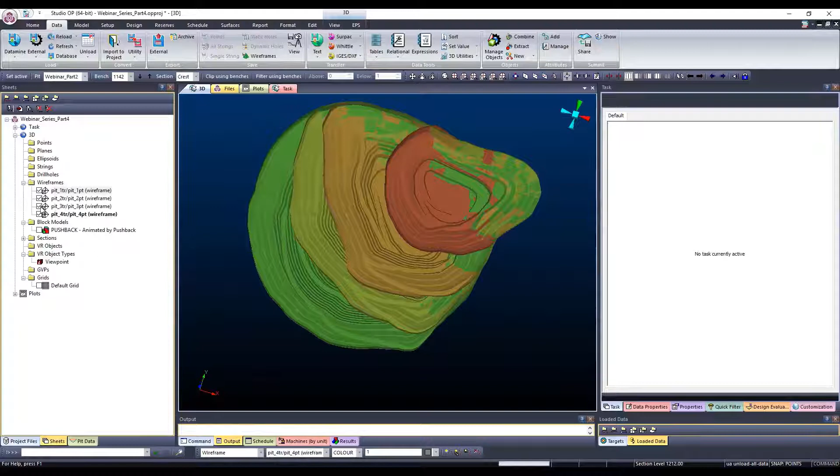Okay, so now let's go to Studio OP. Here Terence gave us the design, and from the last webinar we have this block model legend by pushbacks. As a result, I designed those pushbacks for this webinar.

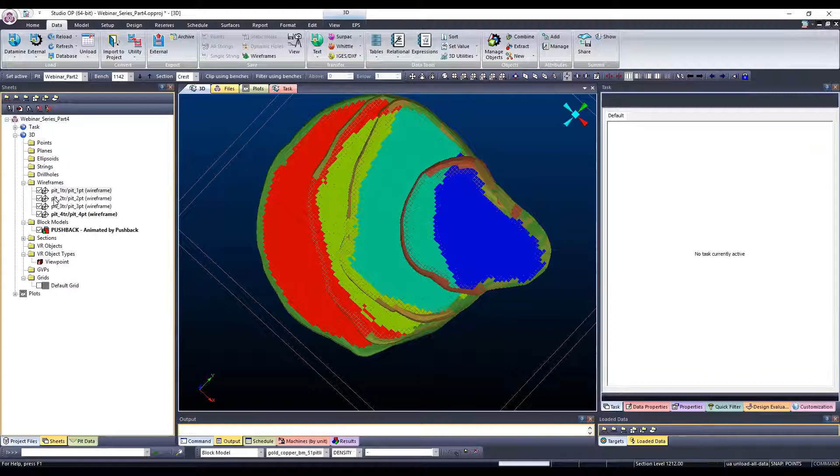First of all, I want to say these pushbacks are not perfect. As you can see, the block model from NPV is just a guide for the pushbacks, but even so, some shapes are not that good, and some benches have no way out. But there's no problem - NPV won't consider this, and also it's not our goal to make perfect pushbacks.

So after we design the pushbacks, I need to save them, and then I can go to NPV. Here I'm using the same project as I used in the last webinar, the same project Hajar used. Okay, here we have our pushbacks.

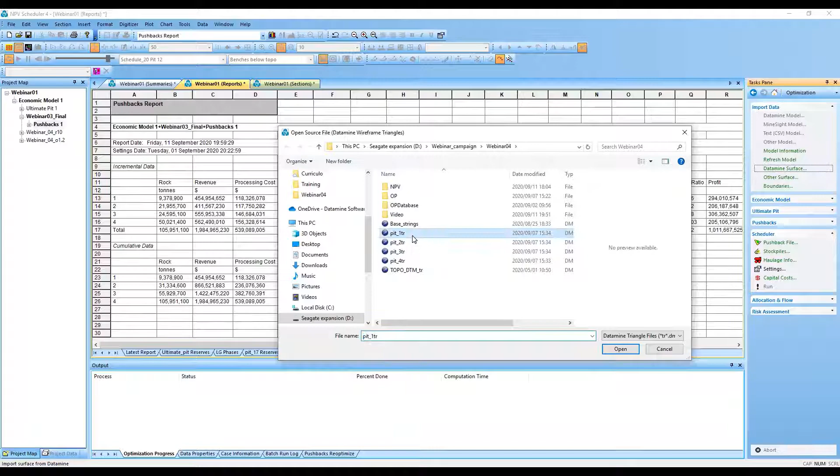So now our first step is to import those surfaces. Here in the optimization section, you can go to Datamine surface. I need to tell you guys that it's very important to import the pushbacks in order, from the smaller one to the biggest one. So here we select our triangle file, then our point file.

Here we don't use any of these fields. Now you need to give it a name. So we're not gonna give it a name like pushback 1. We need to give a name that will group all the pushbacks, for instance, webinar 4 pushbacks. So this is the name I choose here.

Okay, so the first surface I save, and for the next one I just click append to file, and then I select the name I already have - webinar 4 pushback 2. So I'm not gonna do this again.

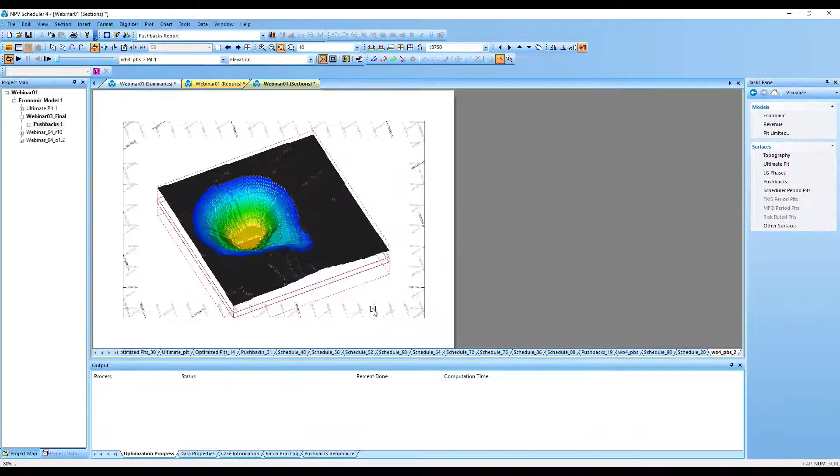So we can visualize the result - another surface, webinar pushback 2. Okay, so here is my first pushback, my second one, the third, and the last.

Just to show you guys, here is my first try - I imported them not in order, so I imported first the third pushback, then the fourth one, and when I imported the second and the first, nothing happened. So that's why it's very important to import the surfaces in order.

You can also go to report and calculate the reserves from each pushback. I'm not gonna do this, but it is also possible.

I also made a spreadsheet here called factors, because as we're gonna do the ramp up, I set how many tons of rock and ore we're gonna need through these years - so the first year this amount of ore, this amount of rock, and the second year, at 3/4, requires this amount of rock and this amount of ore. I also created this minimum and maximum rock and minimum and maximum ore.

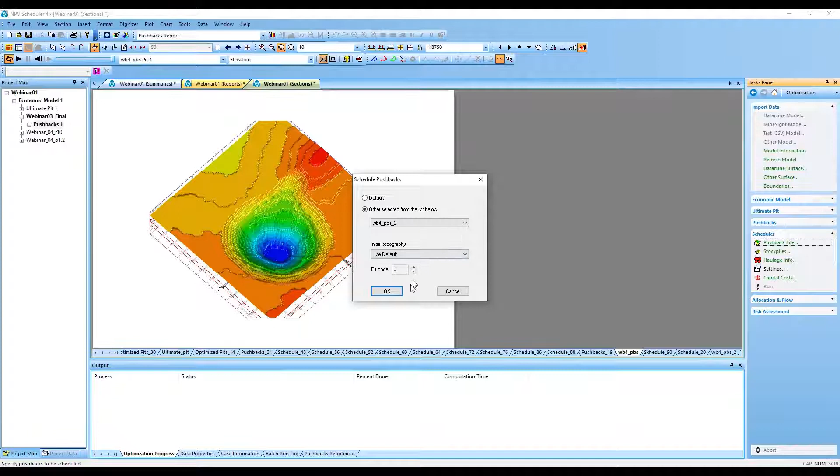Click OK, and now settings. So here is very interesting, those tabs. The first tab calls time, and this tab is about how, without the software, how long is a year, because NPV doesn't know counting by days, but it knows counting by tons.

As it is, NPV considers 1 million ton of ore as 1 year. So every time this number is achieved, it's gonna change the period, it's gonna change the year. We call this a hard constraint, so the software will do everything it can to achieve this value and stay at it. In our case, our rate is not 1 million, it's 1.2, so we can click in ore, edit, and change to 1.2.

Here below we set our ramp up. By the end of 100 years, the factor is 1. I can type, but I can also copy from my spreadsheet. By the end of the first year, I want this factor. By the end of the second year, between the first and second year, I want this factor, and the rest, I want this factor.

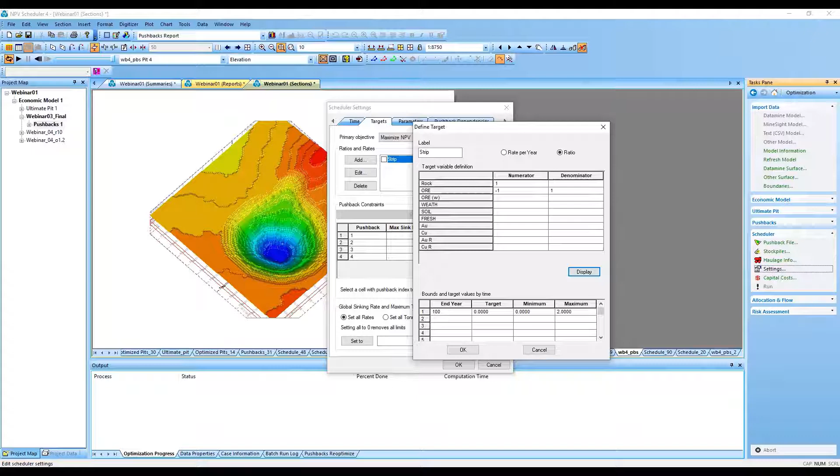Here we also set our targets per period, that's why again I made this spreadsheet, it will be very helpful. In our case, we are not using strip ratio.

We're gonna add a new one, we're gonna call it rock. Rock target. Let's use a different name from the ones that already exist in the block model. So our rock target is rock, is a rate per year.

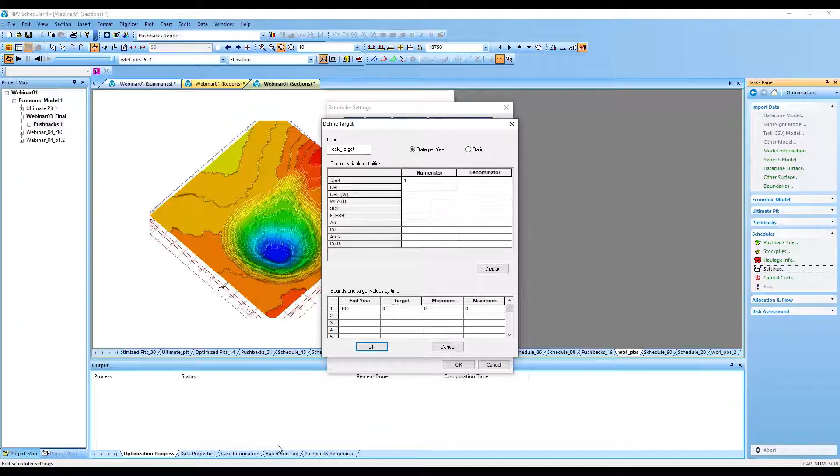And my constraint per period, let me copy here, this period. Target what I want, it's rock, and the minimum and the maximum that I allow as well.

Click OK. Right here, pushback constraints is the part that, as the name says, lets me constrain my pushback. So I can tell which pushback, the maximum sink rate, how many benches each pushback can be mined by period, or how many tons I want to be mined in each pushback by period, or even constrain and tell the software to start mining the second pushback after some period.

If we're gonna use the same value for all of them, instead of typing 6 for instance for all of these fields, we just click here, 6, set to, and it will be filled. Set to all rates and all tons, and this column will be filled.

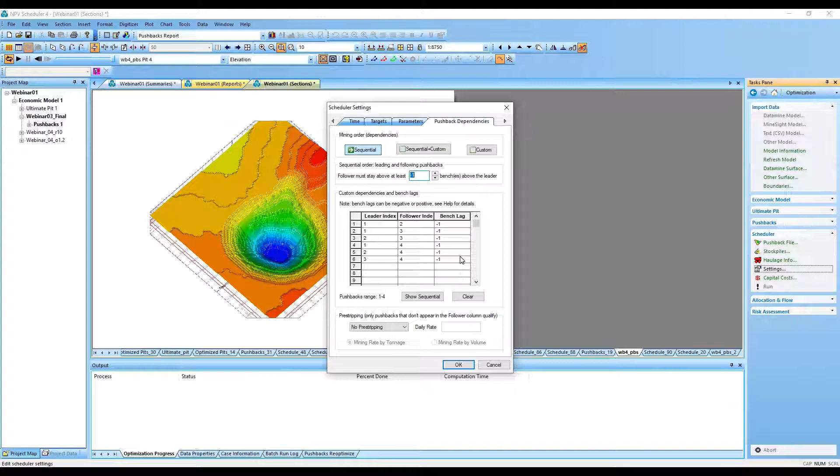So we can constrain some benches. For instance, number 2, here I'm telling the software to only start mining a bench in pit 2 if I already mined 2 benches in pit 1. Or, on the example it's the same, I can only mine 1 bench from pit 3 if I already mined at least 2 benches from pit 2, and so on. Again, it's not recommended to play with this the first time. If you leave it at -1, we let the software, the algorithm, decide how many benches we're gonna mine.

Okay, so now you can press OK and run to see our results.

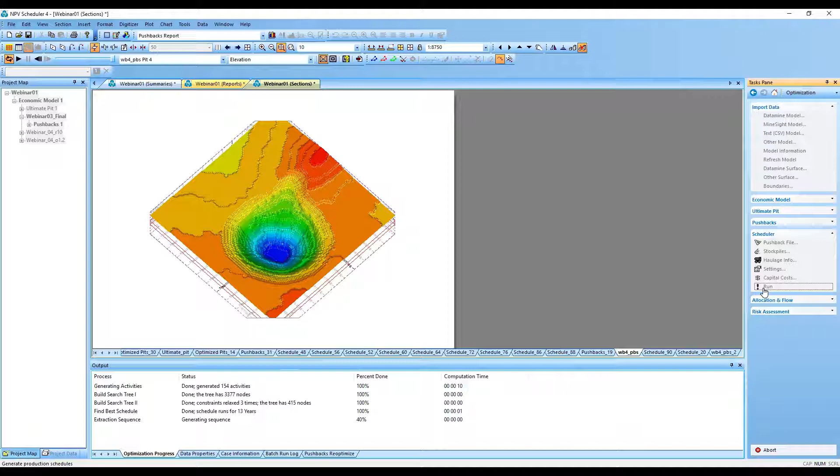All right, so here we can see in this column that the software follows exactly, or very, very close to what I wanted it to do. But as a consequence, the rock is not that constant. So you can see 4, 7, 11, 10, 11, 10, and so on.

Now let's see what else the software can give us. Let's go to report and see schedule by bench. Here in this report, we can see how many benches were mined by year and by pushback. So here we can analyze if any pushback was mined, like 8 benches in one year, or 10 benches, or 12 benches. Everyone has a number, a limit for how many benches can be mined by year by pushback, right?

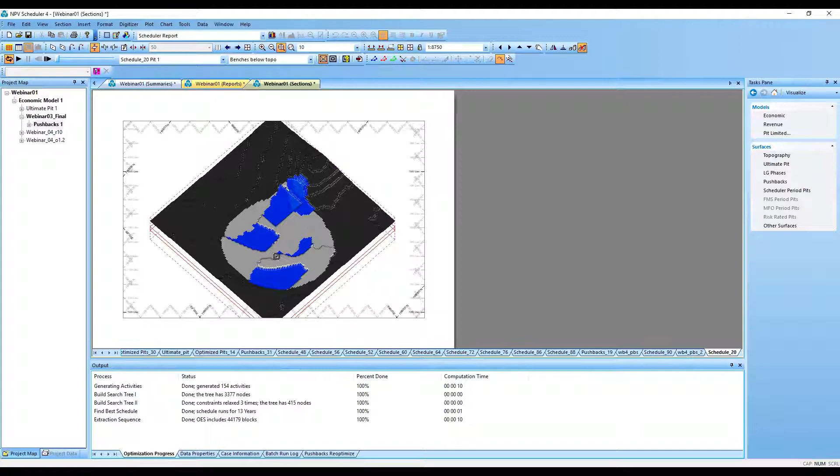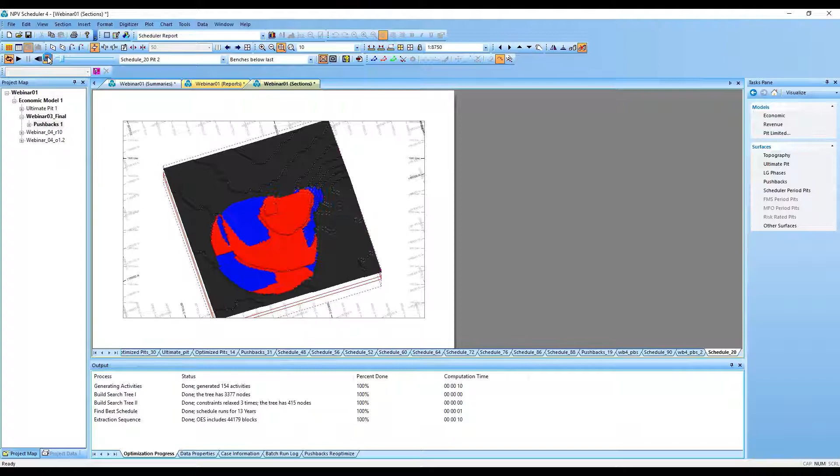Okay, here we are. So the first thing we already see is some activities in the fourth pushback. We see something's wrong already. We need to change, to fix this. I will teach you as well. So here some people like to use the last option, benches below last. It will show you which activity comes after this period. It's up to you. I like to use below topo, and then we see the progress.

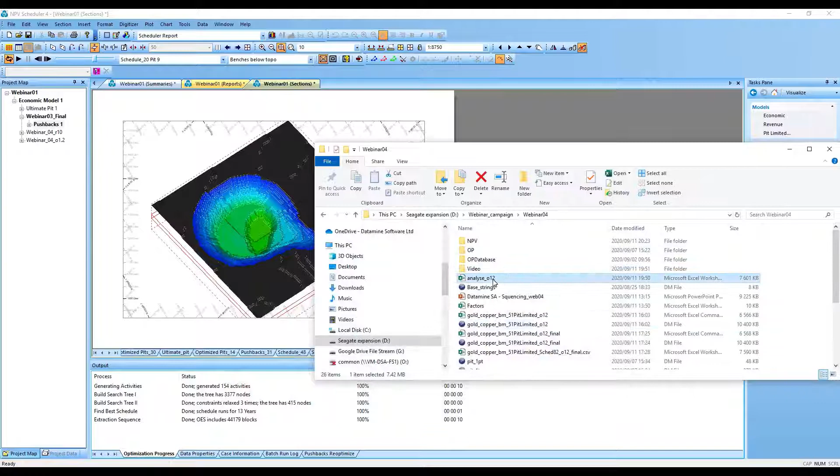We can do some more analysis in Excel. Let's click in data, export model. I already taught you how to export this model in the other webinar, so click here and follow the procedure. Generate this one, it will generate this table. And we click here in File, Save as CSV. And we can create some pivot tables based on this CSV file.

So here I create 2 pivot tables. The first one is the pushbacks by period by Z direction, by bench. Here I generate this graph that shows me from which pushback is coming the tons of each year. As we saw in the visualization, there is a part of year 1 that comes from pushback 4, and I don't want that. Even in year 2, I have something from pushback 3.

It's nice. I also create this kind of filter. I can filter here, but I can also filter here, just to see only pushback 1, by bench. Let me just put it in order. So this is how pushback 1 will be mined. Just things that we can do.

So here my first thought is to fix those pushbacks, constrain when we're going to start mining pushback 4 and 3. We can put the numbers here, I already did that. This part, so my first schedule here is the same. Let me change the report.

This schedule here is the same as we created, okay? My second one now is the one that is constrained by bench, and changes my activity, okay?

All right, I forgot, but when I generate the first schedule, it gives me this information here: how many seconds it takes to create each line. What interests us is the first one, generate activities. It generates 150 activities. As I told you, the optimal number is 300, so we need to increase this.

I found the 6 here to make 300 activities. We will see, all right? And all those other informations are details that can be changed by changing these numbers as well, okay? But I'm not gonna do this. So everything, as I said, is equal, except these 2 numbers were added, and this 6. So we can run it again.

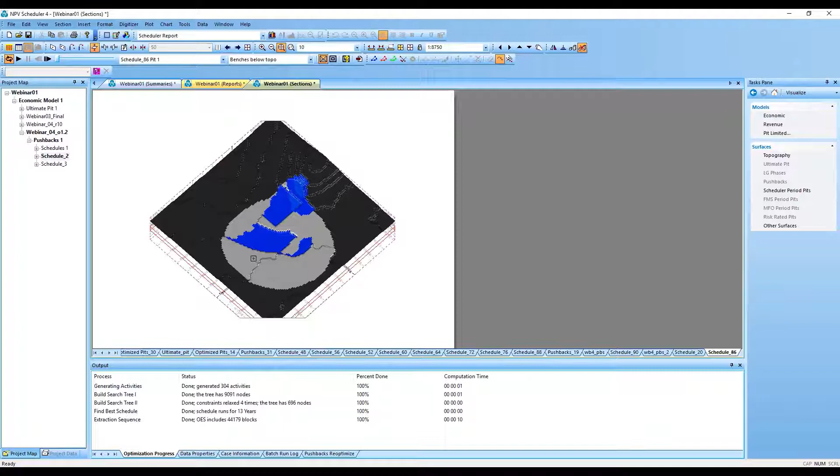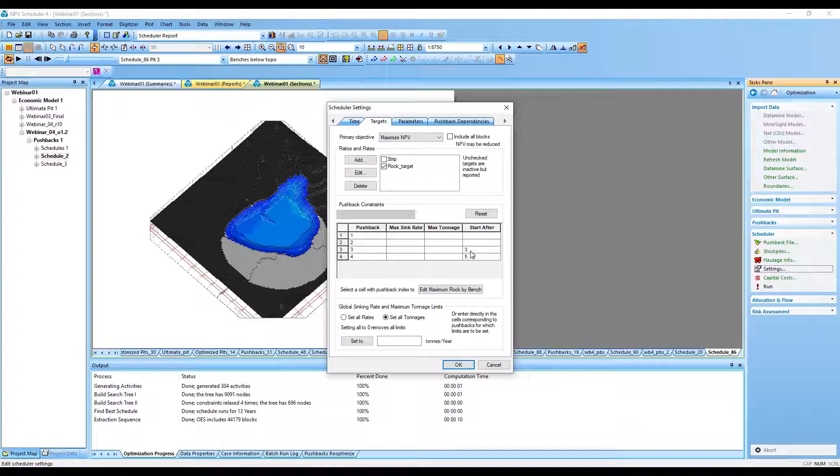So here now there's no fourth pushback by the first year, okay? And not even the third one as well, because here I set that it's only allowed to start pushback 3 after the third period, and that's exactly what it does. Here period 3 there's nothing, period 4 starts pushback 3, okay, and after period 5 starts pushback 4, okay.

I need some improvement to do, because let me show you what this constraint does. So here it generates 1, 2, 3, 4, 5, 6, 7 benches in 1 year for one pushback, and for me this is a lot. I want to constrain that to at most 6, so I can do this, okay? And I did. In my third schedule, I can go to settings.

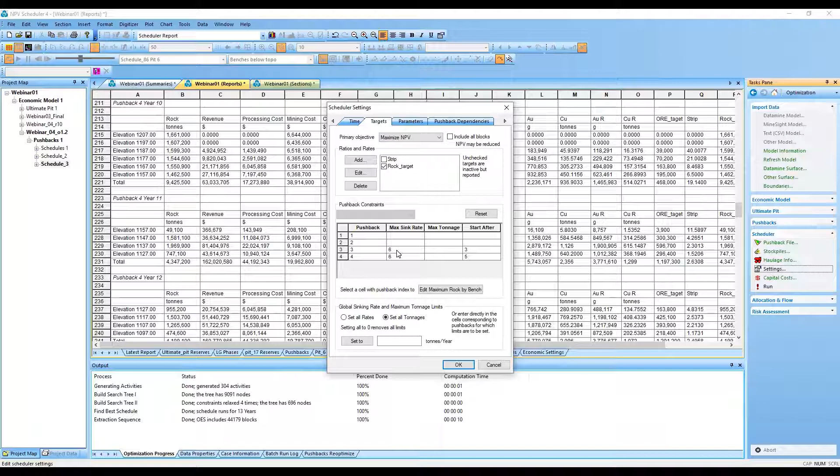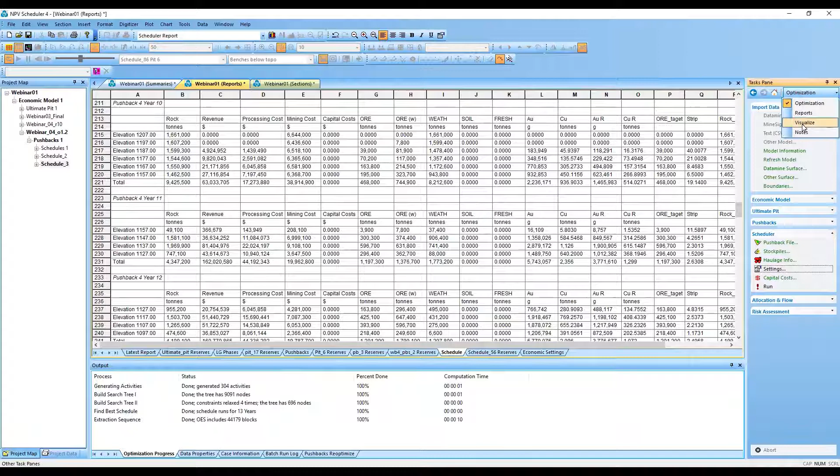In targets, I constrain. First, I constrained only the fourth pushback, but then the third one had more than 6 benches as well, so that's why I constrain both, but the rest continues the same. Okay, to not waste more time, I just need to go to report, schedule to show you the final result. As you can see, again, it keeps the same, and here it changes a little bit from the previous one.

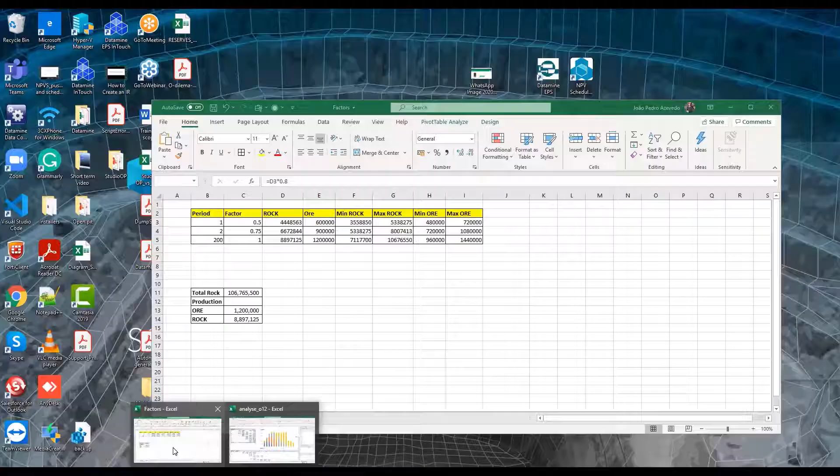So here we are allowed 9 million, and sometimes we are mining 11 million tons. So this is the decision we must make, because it's also valid to make a hard constraint in rock, not only in ore. I did that at first, so I constrained my rock at almost 9 million, but look how the ore goes, it's floating a lot, and it's not good at all.

Okay, even if I stockpile in some periods here, it won't be enough to supply all the other years. And you see, by the end, we have a lot, almost 2.5 million. Okay, but I can improve this. I already did, and this was my best result. All of them almost near to 1 million, some more, some less. And I could constrain and increase from 9 to 10 million rock tons.

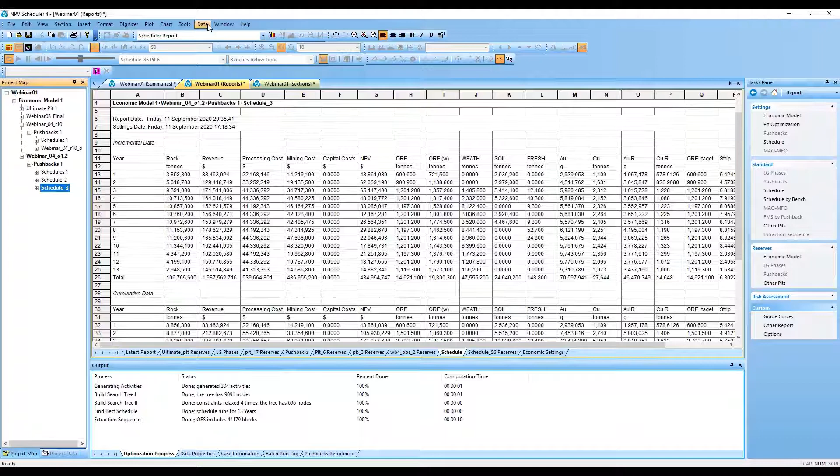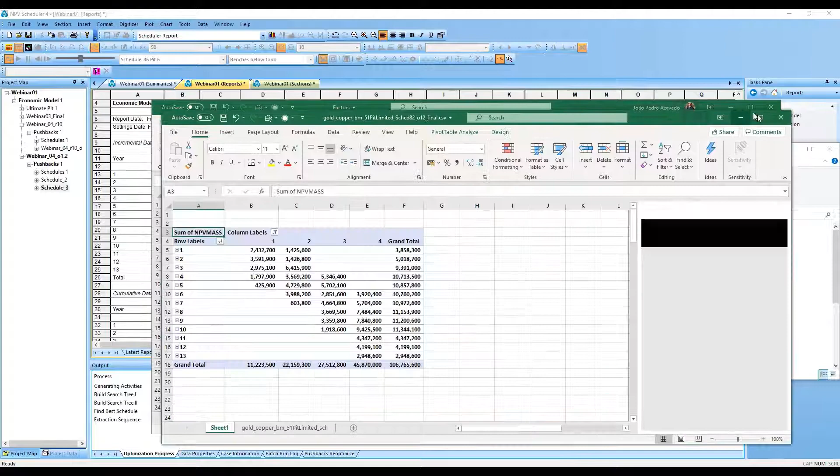Okay, and I will export and generate an Excel spreadsheet the same way. Let me take this one. And this is what I get. Okay, for me this result is good. I don't know about you guys, it's up to each one. We can make some changes, try something more, but for me it's enough.

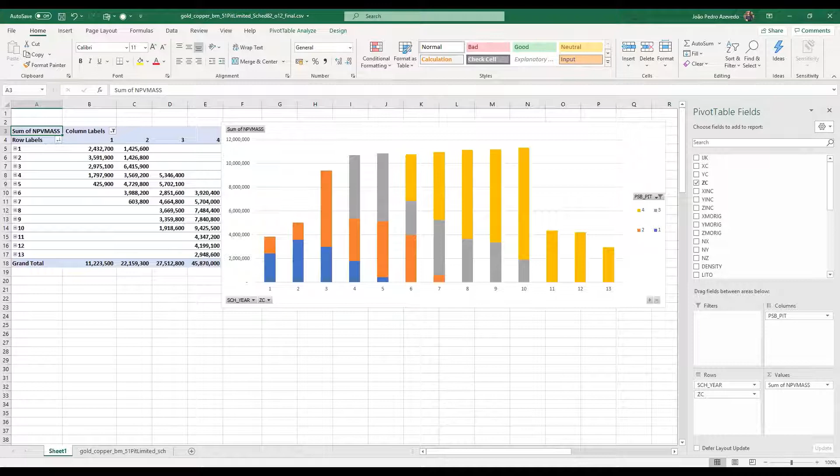All right, so the next step is just to take the file that I exported and drag it to Studio OP.